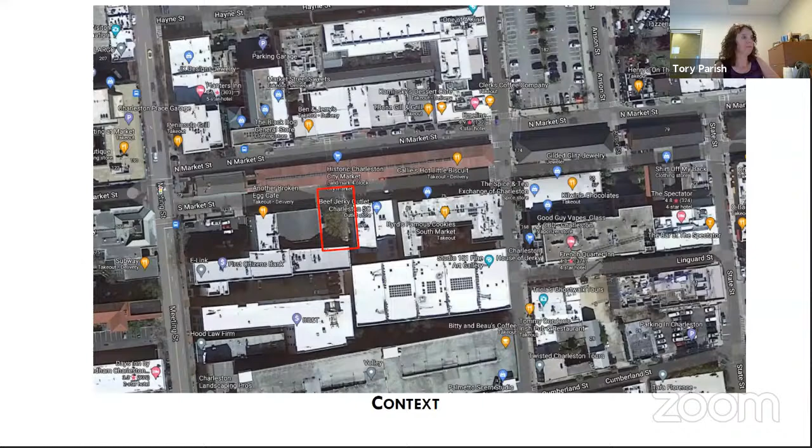And we have some existing site photos prior to the demolition. This one's looking east on Market. And we'll have the applicant present now.

Very good. Who do we have here for the applicant this evening? I'm John Crouch, the architect. Yes, sir, Mr. Crouch, you have the floor. Do you need my address or anything? You can just put it in there for the record, but we know who you are. I'm at 666 Harbor Creek Place in Charleston, 29412. Thank you, sir.

So as I said 2 weeks ago, I bring you the real thing this week. Honestly, it's a pretty simple request. You all saw the state of the Bubba Gump thing, and it was even worse than the photos depicted. Our aim here is to create a unified courtyard using modern materials to create a sort of almost like a European square where you can sit outside and have a little food and a drink with canopies over the entrance.

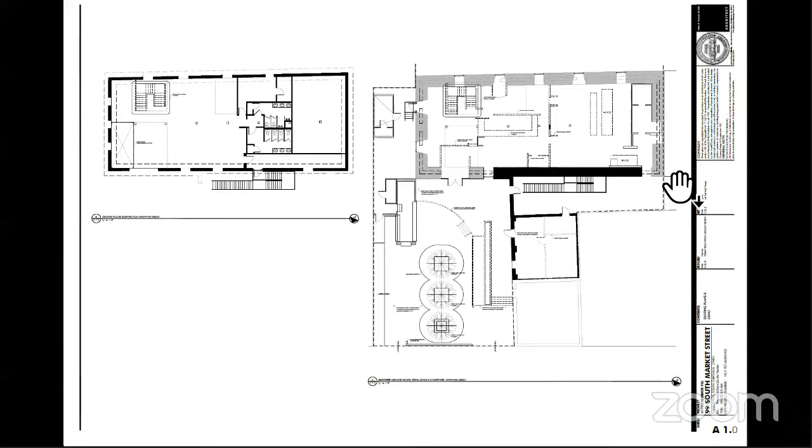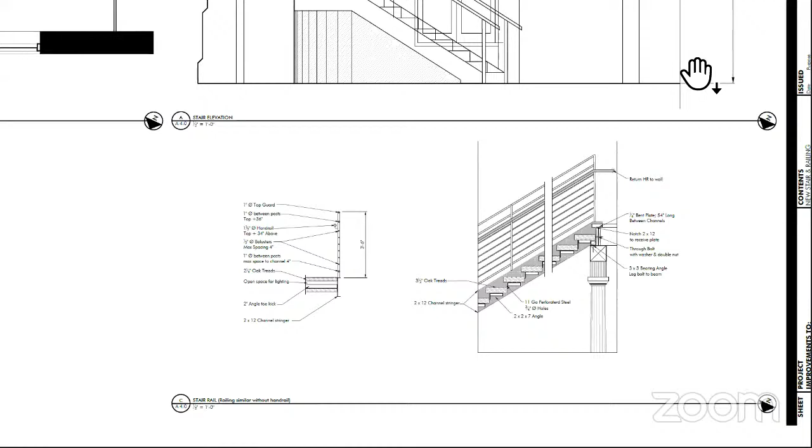You'll see that the canopy slopes back towards the building, and then there's the channel gutter that picks it up on that upper right detail. That detail also indicates the railing, which is simple round pipe to be painted that dark blue color.

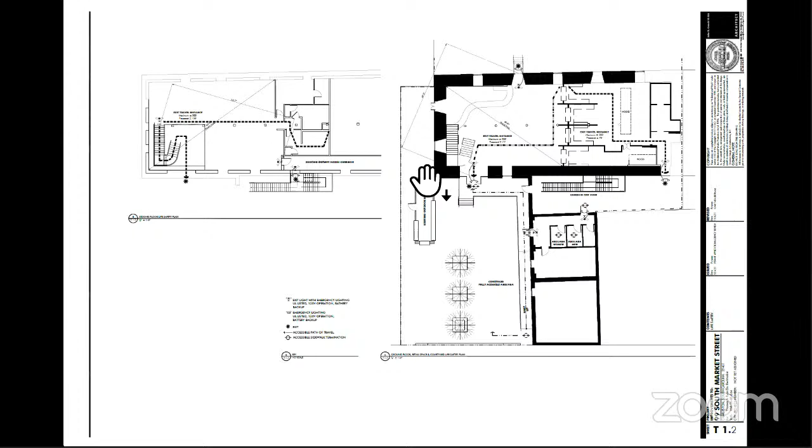On the lower right is the Moscow Midnight color that we propose to paint the base of the building and the base of the little outdoor building. The body of the building is this rhinestone color—it comes across rather gray in this depiction, but it's actually a very crisp white with a little bit of gray, a nice color.

One thing about that: the landlord has agreed to paint not only our lease area building but also the Market Street face of the brick gable building that the Five and Dime occupies, so this assembly of buildings will be unified and the Five and Dime facade cleaned up. That will be in the rhinestone color, a light whitish gray. It's not shown on the drawings, but I'd like you to know that and hopefully approve it.

Let's see, plants, lights—oh, lighting in the courtyard. We have some bollard lamps scattered around. And if you look at...

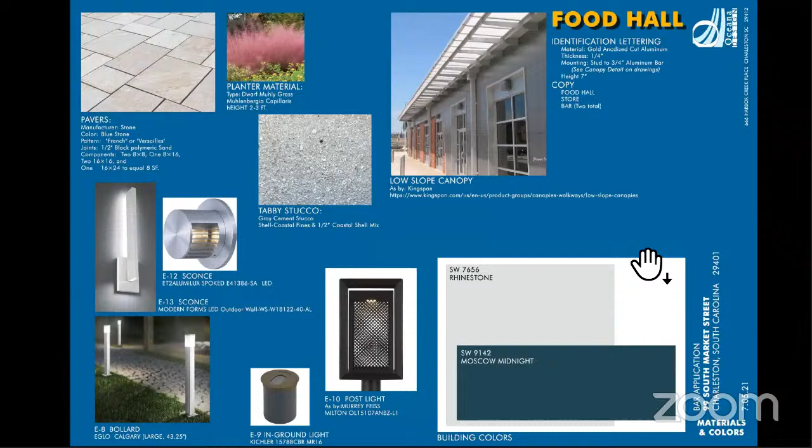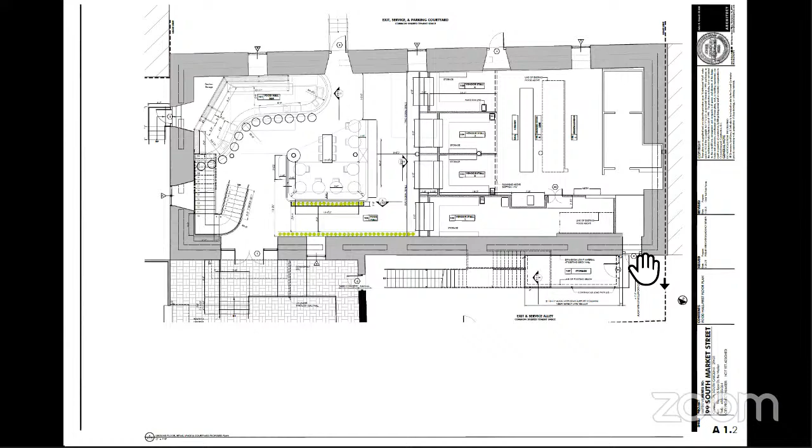I know I'm getting close on my time, so I'm hurrying through this. That's food service. Yes, if you go to A7.2 on the permit drawings, you'll see along the ramp there are six of these post lamps—that's the E10 post light shown in the middle on the supplemental information.

This is one of those times when it's tough to do it virtually, because you have to go back to the supplemental information and can't refer to two things at once. Sorry.

So they're very well screened lights. I didn't want people walking down the street to have bright lights shining in their eyes—this is a diffuse light that will light up our walkways.

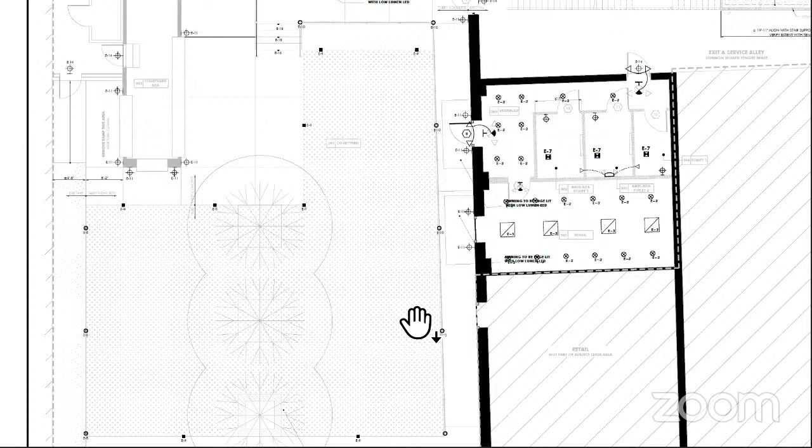The lamps in the courtyard are the small bollards, again hidden-source lights that shine down, and there are a couple of in-ground lights just to create a more uniform illumination.

There are lights on either side of the main entrances to the doors, and a couple of little sconces—round sconces that shine down. Again, all the light sources are shielded. I just don't like to have points of light shining in my eyes, and I try not to do that in my projects.

Really, that's about it. If you want to refer to the elevations, I think that would be sheet 2.0.

You can see the main elevation of the entry, with its canopy over the new doors. Those doors are the same kind that go into the retail space on the side—wood, full view glass doors. Nothing controversial there, and they unify this courtyard, getting away from the standard bronze aluminum doors that are there now.

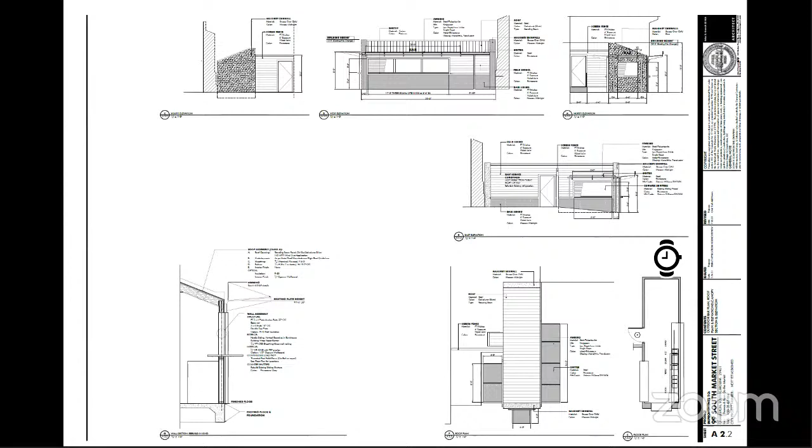So if you look at this, the base of the thing from the ground to that first hip in the brick is the dark blue color, and then the remainder is the limestone, the white. Then if you go to A 2.1, you'll see the other view of the courtyard, and that's all the limestone color. We're going to carry that around on the front of the gable building, not up to Broken Egg, but it'll stop at the Broken Egg building—or Mistral, if you remember Mistral. I love that place.

So really, if you have questions or clarifications, I'd be happy to make them, and I'm open to discussion.

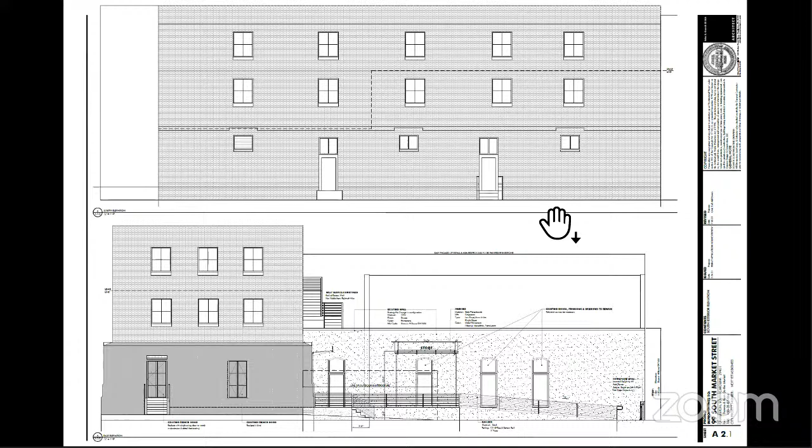Thank you, Mr. Crouch. You're welcome. Do we have any public comment on this agenda item? We do not. All right, then we'll move on to city staff comments and recommendations.

Some staff observations. Number 1, related work received after the fact approval for demolition at the June 23rd BAR meeting. Number 2, previously shown artificial turf has now been replaced with appropriate specialty pavers and other surfaces. And 3, details on the new planter atop the extended wall at the sidewalk and lighting have been provided to a cursory degree. Staff requests additional clarity on the proposed lighting.

Staff comments. Number 1, construction has already begun, although a stop work order should be in place. Applicant is advised that work is not to begin until approved by the board. Number 2, existing trees are to be protected during construction. 3, provide manufacturer's cut sheets or information on all proposed exterior lighting and include photometric data for each fixture type, as well as the whole courtyard area. And 4, provide clarity on the proposed color scheme.

The south courtyard wall is connected to or is part of 182 Meeting Street, the First Citizens Bank. The east courtyard wall is part of the building that fronts South Market Street—that's the 5 and Dime General Store on Google Earth—and looks to be painted like the proposed body color. Confirm the extent of the proposed painting. Staff recommendation: final approval of courtyard renovations with board and staff comments, with final review by staff of exterior lighting and paint.

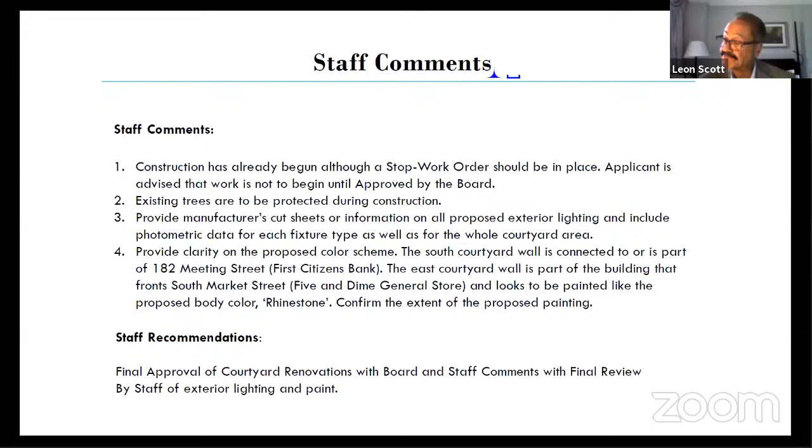I would be happy if that stays on staff level. Okay. Thank you, Ms. Wheeler. Further board comment on this agenda item?

I'll just add that Ms. Parrish has given enough indication that she would like to see mock-up panels sampling the color because of the prominence of this facade and where it's located in the city. While she would defer to staff and appreciates our trust in that, she thinks it may come into the board's need to review just because of where it's located. I'll just give that as food for thought.

Any further board comments? And if not, I'll be glad to entertain a motion.

This is Kara Wheeler. I'll make a motion for final approval of courtyard renovations with board and staff comments, with final review by staff of exterior lighting, paint, and paint mock-up on site. Ms. Wheeler, your motion, as I understand it, is for final approval of courtyard renovations with board and staff comments, with final review by staff of exterior lighting and paint and a paint mock-up. Is that correct? A paint sample? Correct. Okay, you have heard the motion, and Ms. Wheeler has confirmed that I've restated it correctly.

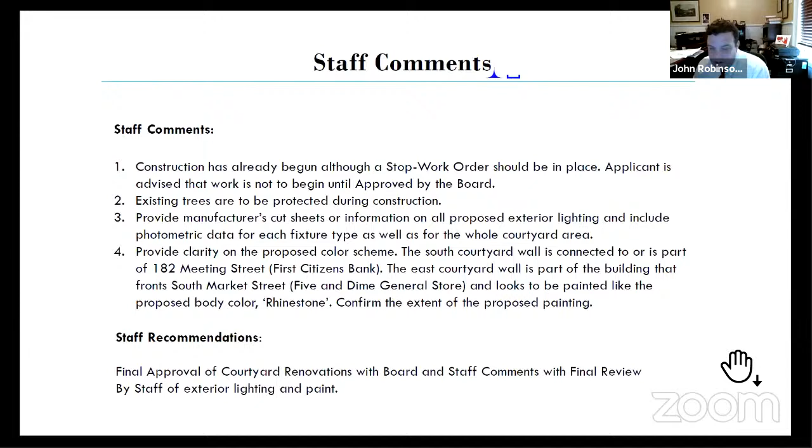Thank you very much, thank you to Mr. Crouch, we will work with you on the paint. I'll be happy to. And the lighting. Thank you very much. Okay, Mrs. Parrish, when you're ready, agenda item number 2. All righty, we need to get Mr. White back in the meeting. And thank you, Ms. Wheeler.

There we go. All right, agenda item number 2 is 284 Meeting Street. The request is final approval for new construction of a commercial and residential building. The project is in the Ansonborough neighborhood in the Old and Historic District.

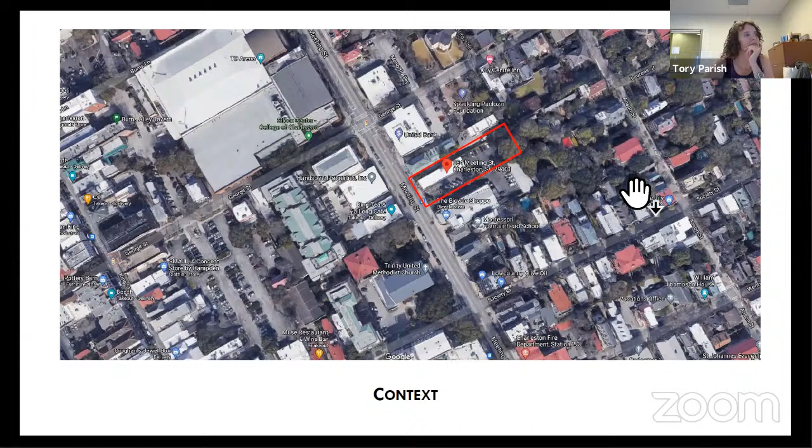The aerial context shows George Street running southwest to northeast in this photograph, with the project site outlined in red. Then we've got existing site photos looking directly at the project, from the north side, from the south side, looking south on Meeting Street, and looking north on Meeting Street. And then another aerial giving more of a pictometry look.

I'm going to run through the previous staff comments from the June 26, 2019 meeting, since we will be referencing these. Number one, drawing sheets should be numbered and a drawing list provided on all submittals. Also, notes of materials and other information should be called out on the proposed elevations. Number two, a masonry wall on the south property line is now proposed versus the previous proposal for a wood fence. The storefront design and materials have improved.

Sapele versus aluminum, but GFRC is not preferred at the lower levels. Number three, the retail entry has been recessed and specialty paving provided from the entry to the property line. Number four, the mass in the north-south direction has been reduced 3 to 4 feet.

The board had requested a much greater reduction in the mass of the rear to align with the front building. Staff feels that the addition is acceptable as now proposed. It is far enough back, 140 feet, and now includes windows on the south elevation by being set off of the property line. The normal pattern of rear additions being held back to align with the front building is more applicable to additions on existing historic structures.

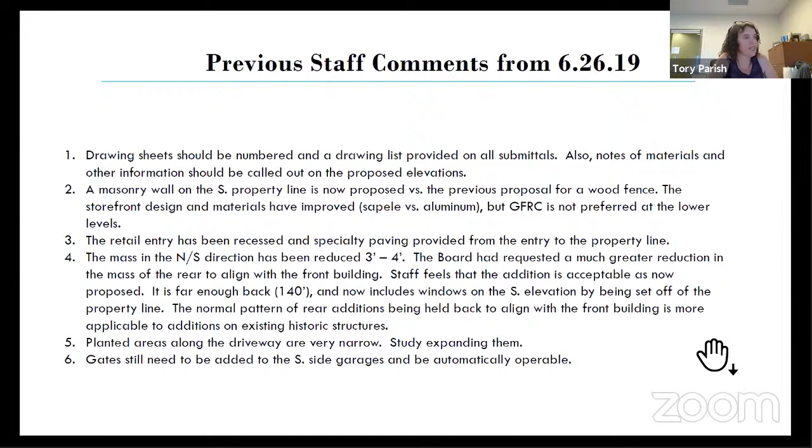Number five, planted areas along the driveway are very narrow. Study expanding them. Number six, gates still need to be added to the south side garages and be automatically operable.

Seven, provide a fence and gate at the north between the buildings. The gate bottoms should be lower to the ground typically. Eight, spandrel glass shown on the rear of units 1, 3, and 4 would not normally be permitted, but it is on the rear and minimally visible.

Nine, driveway gates should be wrought iron and mounted to the masonry piers rather than to metal posts. Ten, there's a conflict on the call out for garage doors indicating wood in some cases and metal in others. They should be wood. Number 11, metals for railings and fencing are alternately called out as iron or painted metal. All should be wrought iron.

Twelve, at some units, opaque glass is used at kitchens. The color and opacity of these needs to be studied carefully to minimize visual impact. Thirteen, scuppers and downspouts may be best as painted metal to match other metal elements on the building. And fourteen, what is noted as limestone looks more like cast stone on the sample board. Confirm that it is in fact limestone.

The board motion only included staff comments. And we will have the applicant present.

Very good. I believe Mr. Schmidt is here to present to us this evening. With us, Mr. Schmidt? I am. You have the floor, sir. Thank you very much. I'm Joe Schmidt, Evans and Schmidt Architects.

We are bringing this back after what looks like a considerable long time. This is sort of a byproduct of COVID, where design-wise things got set aside as well as construction-wise. So there was no interest for the developer to be building this project, and it has sort of fallen silent. And we're recognizing that it's time to bring it back. We apologize for short memories for a long span of time since whoever heard this application before. It's almost too long ago.

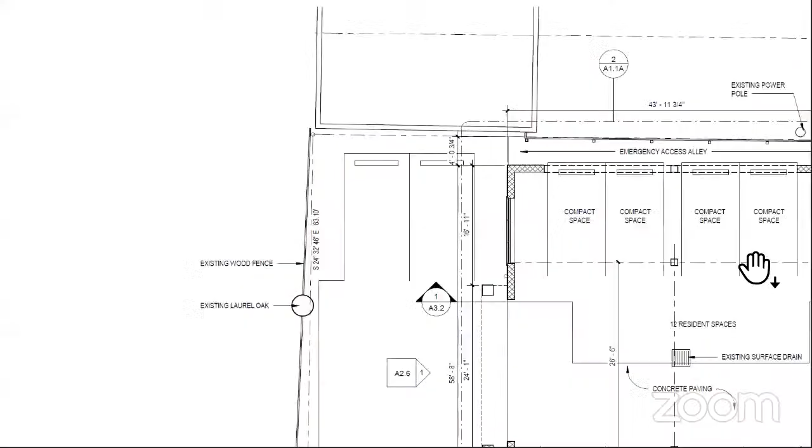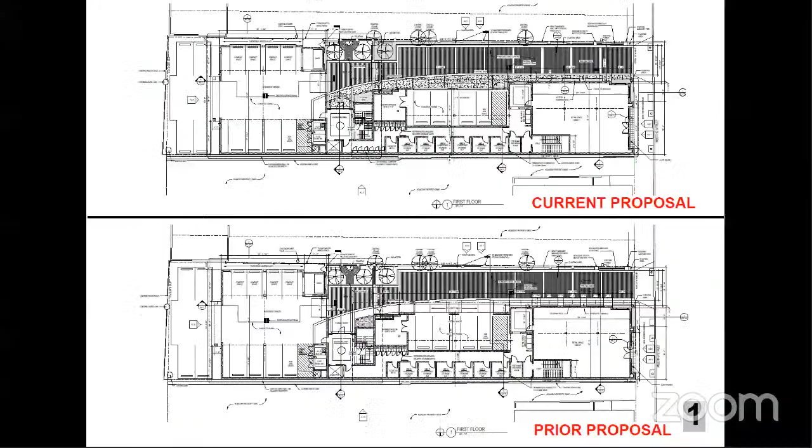We have made the corrections to the drawings that have been discussed. The first being, you might go to slide number 46. I apologize, I just let you plug the numbers in, but I guess not. That's okay.

This location, Tori, I'm a little thrown off because what I got back from staff didn't have a 13 and a 14 in it, so I don't know what to say to the limestone. I don't even know what we presented it for. But this was GFRC before, and we went to cast stone here. So limestone would be a bit much on that cornice work up there, but it's maybe something we have to take up separately because I'm not sure where limestone was called out. Right now, things are being shown as either stucco or cast stone. I don't recall us ever presenting limestone on the project, so a little bit confused on that 14th comment.

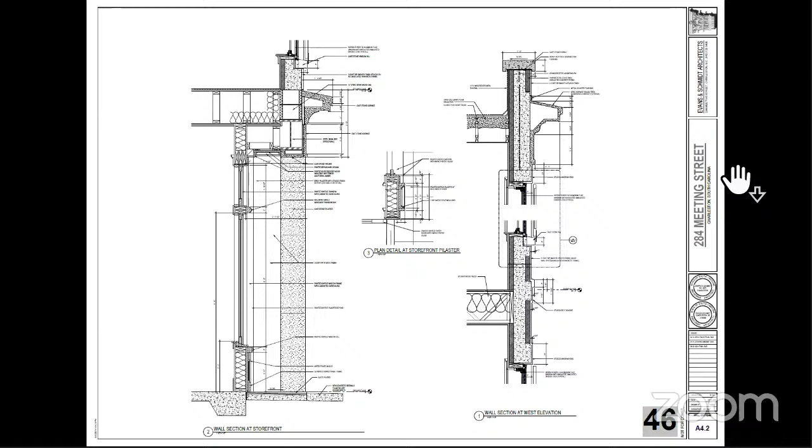While he's getting there, I can explain what it is. There was concern that the planting bed was not wide enough, and you'll have to believe me that every developer or owner would rather have more planting bed and less hardscape pavers.

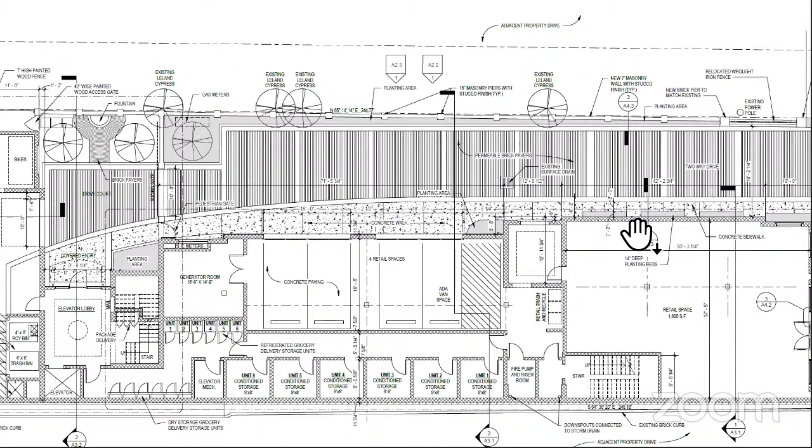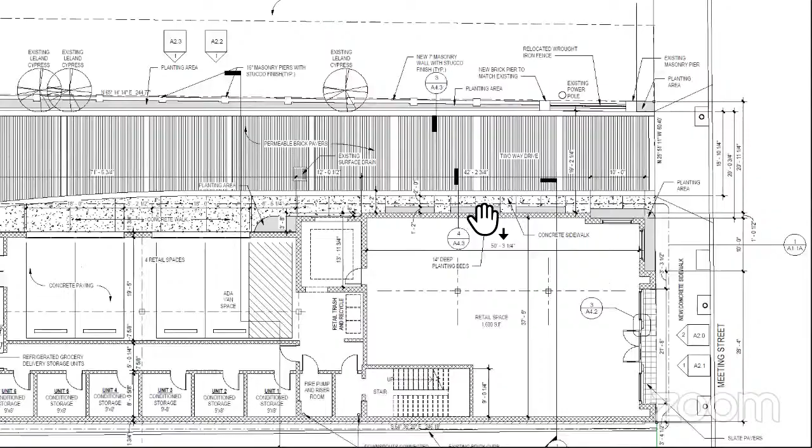The reason it is the way it is due to the fire department insisting on the width of the driveway being what we're showing. What we've been able to do is narrow the driveway down and create a sidewalk so they can drive on that too. All we were able to give is that little planting bed where the hand is right now. Used to be 6 inches, and we were able to push it up to 14.

But what's happening is if we're not careful, we're getting into a situation where we're pushing everything over lopsided. We just can't - they want the width that we're showing them, and we can't do anything less than that. So we believe 14 inches will obviously allow things to be grown in it.

The next item that came up was number 18, which we talked about a little bit. I'm sorry, not number 7, which is slide 18. Shows best what we're trying to say.

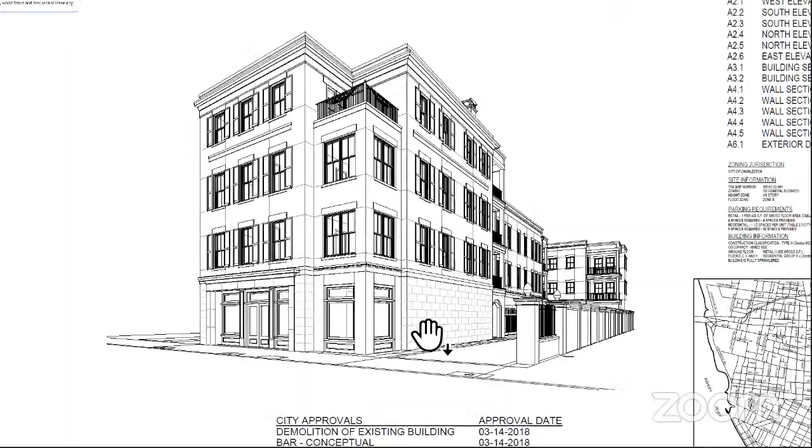So what you see on the storefront will be beveled or reglet. That's our desire, correct there. What is shown on the south side of the building - no, don't come back to the south. That's the south side. We are not proposing to reglet or bevel that, but the notation implies that that's supposed to be rusticated too.

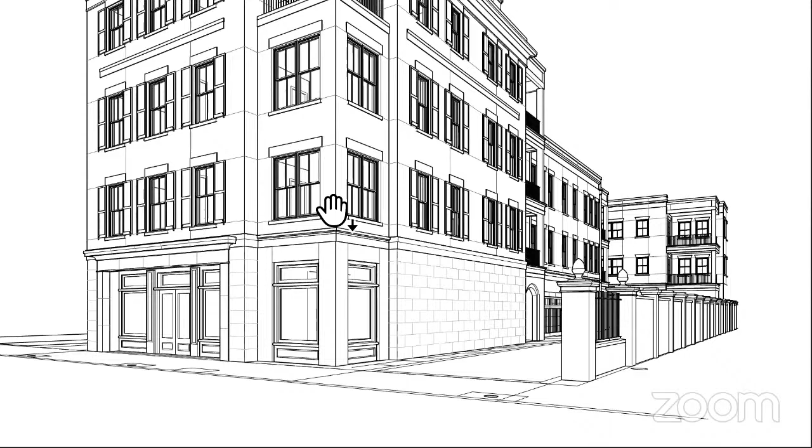The appropriate thing to do for Ansonborough, for basically all of Charleston in this kind of situation, to not have a blank stucco wall, is to pencil score - which implies pushing a pencil into wet stucco. It's a very subtle technique. The goal is that that pattern will match the height of the reglets on the front of the building, but it will not be the kind of rusticated stone the city was describing. So just wanted to clarify, we have not exactly given them what they asked for in that case.

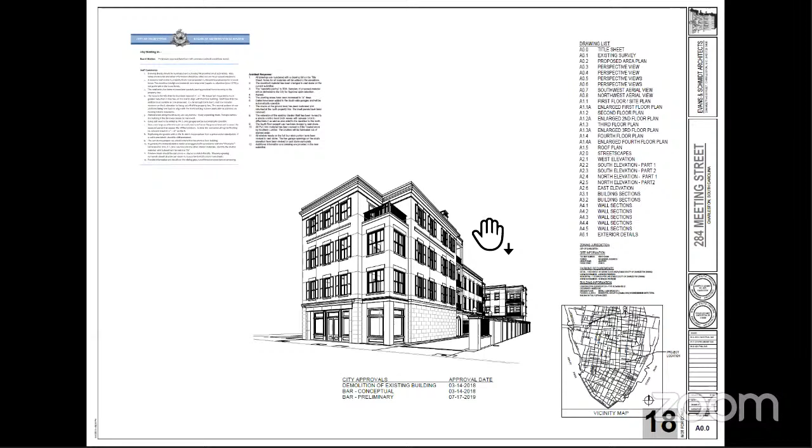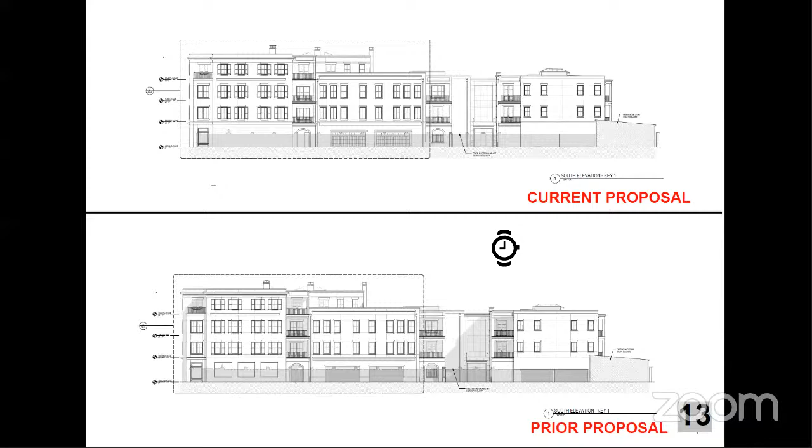Item number 8 is about replicating the garden wall on the north side being inappropriate. If you go to slide 13, it would show it best. What you see in the prior proposal is what we proposed before, and what we have put into the current proposal but don't agree with is on slide 13.

The current proposal up top, where it is, when he gets there, is just a solid brick veneer applied to our building to give some relief to all that stucco along there.

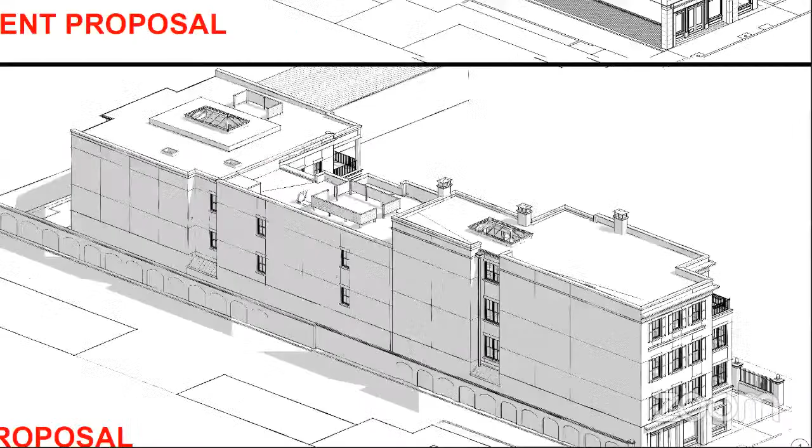What I'd like to do is bring it up for discussion. We could not submit a changed drawing, but once this got advertised, the neighbors next door directly to the north, where the hand is right now - which is 286, there are 9 condos on that project at 286 - have come to me and asked if there's any way to go back to the prior proposal or some facsimile. And I do not disagree with them, for 2 reasons.

What needs to be remembered is that what you're looking at in the back half, 124 feet back from the street, you see a small jog in that garden wall. Go mid-screen, come back right there. That is the beginning of what's left of the original 1801 wall going backwards.

It's all old Charleston brick. It's stucco in the arches. It's been that way since it was built. And then it stops right there - it stopped because they tore down the front portion when the current building was put there.

I understand that, they obviously agreed to it. What we are proposing is just to put 4 inches of brick on the face of our wall from that point forward - not old brick, but new brick. So it won't match in color, texture, or size, but it's brick because it's a better relief for them, which they've asked for, and it's something we worked out with them in the previous application, which went by the wayside based on staff's comments and our corrections in the current proposal.

If we did that, we'd be applying 4 inches of brick to our wall, and where we're not applying the brick, you'd get the stucco arch look, because it's a stucco faced building. I know everybody in Charleston is much smarter than our tourists, but I can't imagine anybody being confused that we are historically representing this as an 1801 arched wall when it's what we end up with.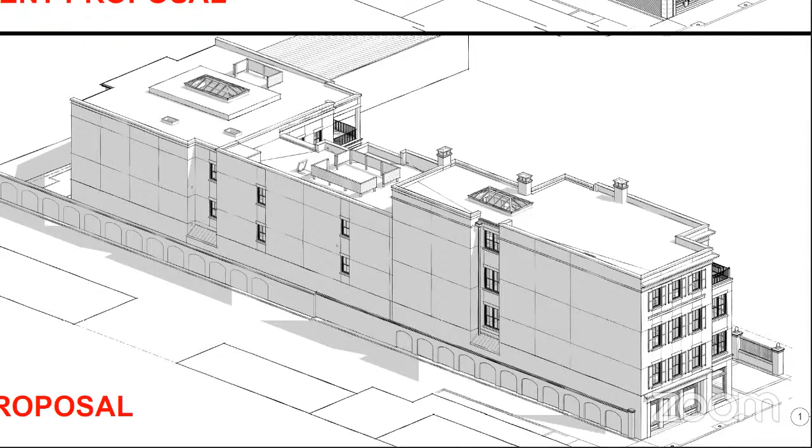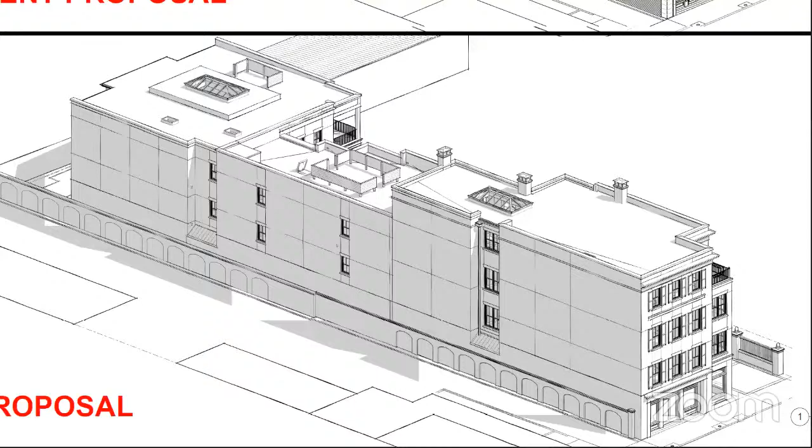It could be painted in that pattern, but I think their real point is they were looking for the calmness and texture of brick rather than more stucco, because they're being confronted with a north wall that's very typical, but not something they're used to. So I'll let that go to later discussion with the board. I hope it'll come up.

I think we've followed everything else that's been asked of us. We did do cast window heads to match the sills on the front of the building. This would be on elevation slides 37 and 38. We do not, and still do not, agree with taking it any further back into the site. There's always a hierarchy of buildings, and we are maybe a new building, but we're in Ansonborough, and we'd like to follow as much of that hierarchy as we can. So you'll see on 38 we have cast stone heads on that front portion, but not in the back. We have shutters on that front portion, but not in the back. We believe this is the better way to express this building.

We are not trying to copy, but we are trying to complement, as we've said all along, 286 Meeting, which is a very fine, properly proportioned Adams-esque building from 1801. I think it's best, since I'm hoping there is discussion on that one item about the north wall, that I will close and open it up to see where we can go with it. Thank you. Thank you, Mr. Schmidt, I know there's a lot of ground to cover, and you did.

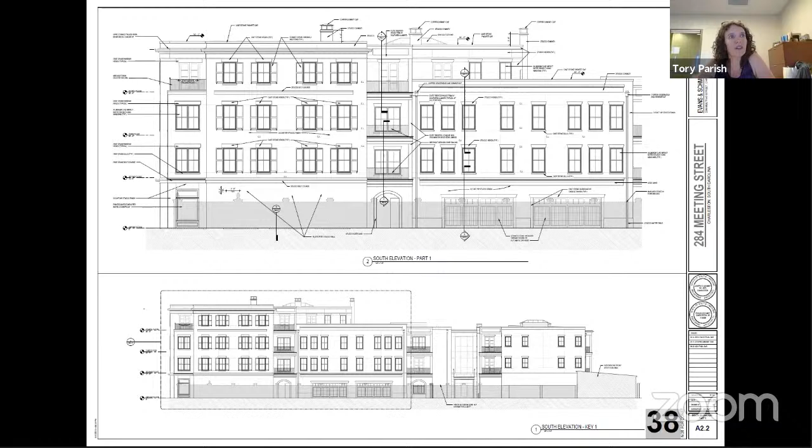Yes, I'm here, I appreciate the time to have a quick comment. I'm the HOA president of 286 Meeting. We appreciate Joe bringing back the comments on the arches. We think, we're going to go from having light and a nice historic area to having a 4-story building next to us. So the least we'd like is to have something attractive to look at as we go down the driveway.

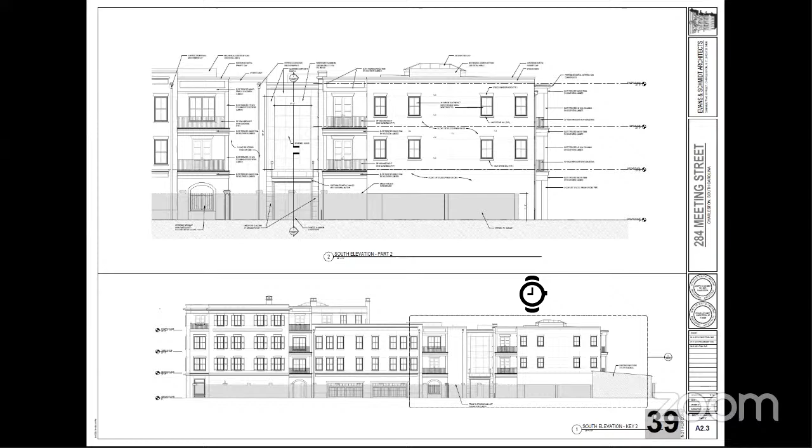If you look at the other side on the first floor, it already has that same arch, so it can match between our side and across on the other side where the wall is going to be. So our request is to have the initial proposal of the arches and brick columns as explained in the initial design, as well as the 4-inch overhang if possible on the 284 side and not the 286 side, so it doesn't affect our shrubbery or trees. And the final request is, we have the brick wall in the very back of our building that's from 1801, and when they go through the process of building this new building, if there's any damage or anything affected by this wall, just make sure it's fixed and corrected.

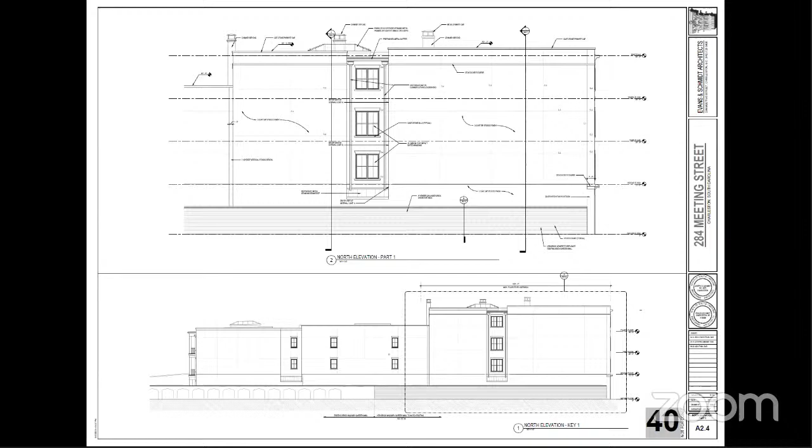Okay, thank you very much. Does that conclude your remarks, Mr. Kessler? It does. Thank you very much for your time. Yes, sir. Thank you for choosing to appear.

We will now move to city staff comments and recommendations. Ms. Parish. Staff observation: this project was well received by the board and staff at preliminary review and has changed little since then.

Staff comments. Number 1, applicant has apparently not addressed preliminary review staff comment number 5 regarding the widening of planting beds along the driveway; this was written before tonight. Number 2, the rustication of the base of the front portion as noted in preliminary review staff comment number 7 should include recessed bands between what reads as blocks of approximately 1.5 inches in height and a half inch deep. Staff will work with applicant to achieve an appropriate spacing and pattern in the stucco.

Number 3, the cap at the wood fence should be sloped to drain, and the fence composition should be similar to our typical double-sided 6-foot urban privacy fence.

Number 4, staff has no problem with the Southern Lumber Elite pressure treated wood being used at the rear painted portions of the project. Additionally, staff has no issues with this product being used at a painted storefront due to the difficulty of tracking sustainability certifications through the harvesting, production, delivery, and replanting chains. A sustainable tropical hardwood is acceptable if its sourcing and delivery chain can be verified and documented.

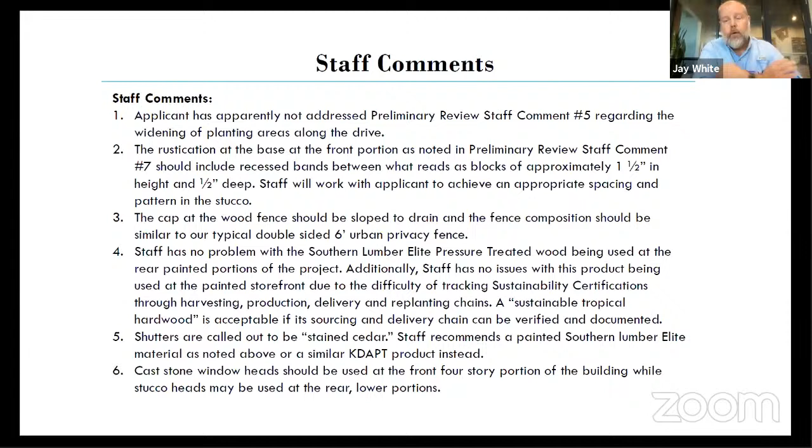I've always been a little bit nervous about elite treated, and we've actually pushed other applicants to not use it on prominent projects. My only other comment is I agree with staff comments and recommendation otherwise. And I'm perfectly fine going back to the previous iteration of the site wall, especially if it's at direct request of the most affected parties. Then I'm perfectly fine letting them go back to that. But that's all I have.

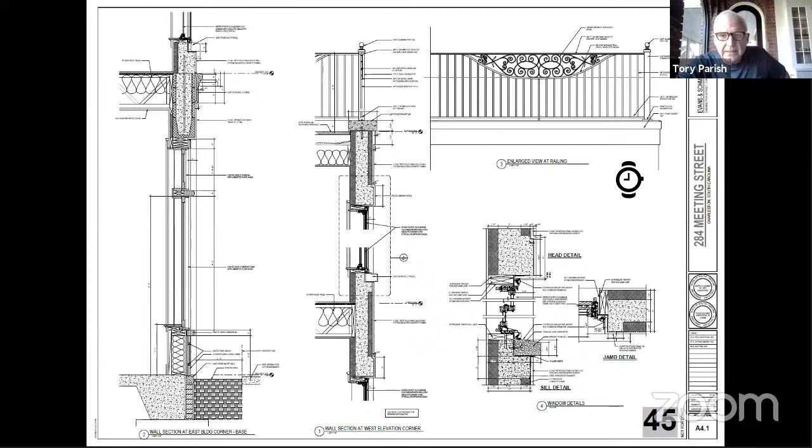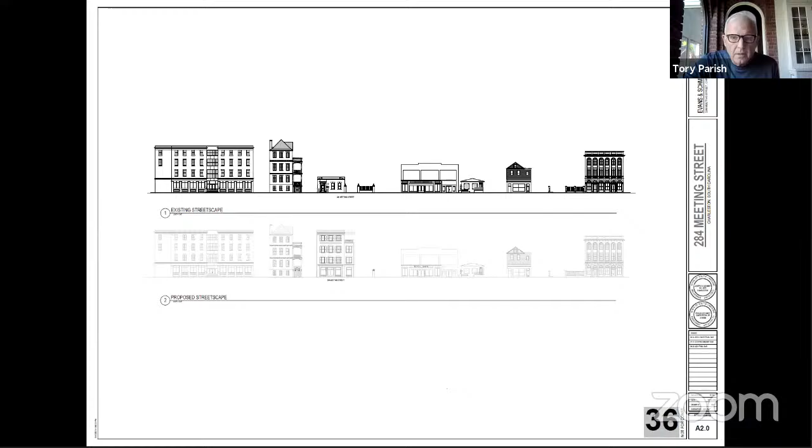Mr. Chairman, yes, James. Could Lawrence go back to the current versus previous, showing the west elevation. I guess there was one when I was reviewing it earlier called the north and west elevation.

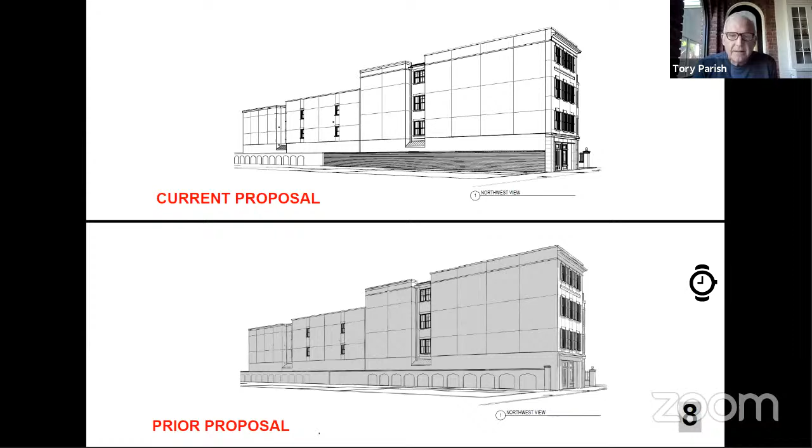Is there another version of that, Lawrence? Or maybe I was just looking at it on the big screen of my office. Hey Joe, I got a question for you. The west. North and west. That I think is west, right? Yes, yeah. So okay.

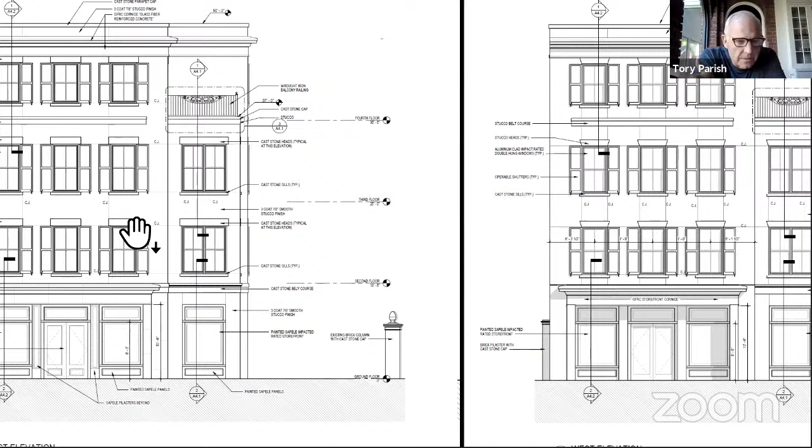The details above the windows in the prior proposal were on an angle at the headers, and it was changed to what we see in the current proposal. It's difficult to see on this drawing. There's another drawing where you can see the expansion joints—I'm going to call them expansion joints. I'm guessing that's what that is. One of the reasons you changed was so that a joint would align; here it cuts through this arch, and on the other one it kind of aligns with it. So these are expansion joints? Control joints, excuse me. We will need control joints there.

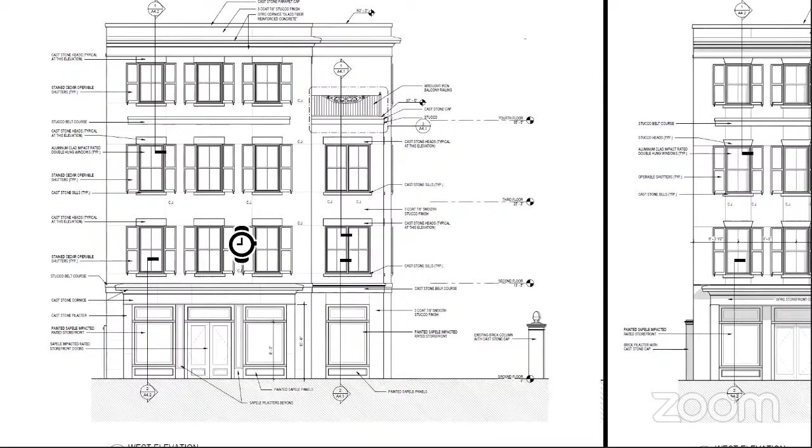What we do, and we do it very successfully on our projects, is we have them caulk. We do the metal control joint, the W-shaped form, we caulk it, and they put sand into the caulk joint. Then when it's all painted, it is about as invisible as it can get.

For your question about why we went from angled to straight: once we're going to a cast stone head versus a stucco head, the concept needs to change so that it has proper looking bearing for a stone head—it's not really a stone head—so we elected to go to the square type. We did shift the stucco line over because of that, and that also helped because it aligns the sill with the head.

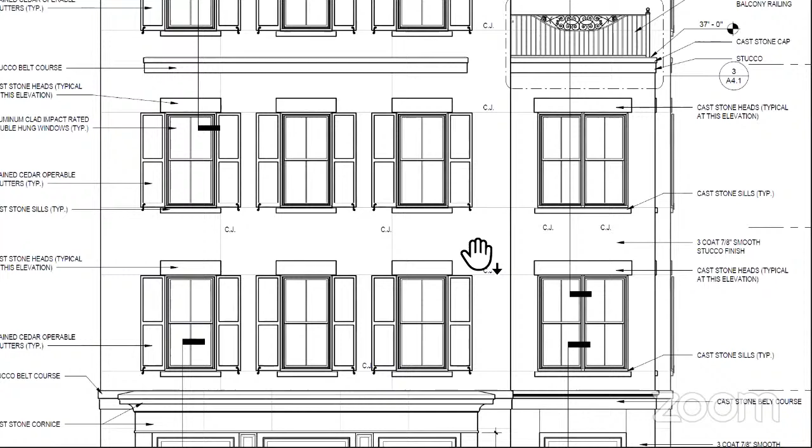So if at some point it does show up, and there's always that risk because of the stucco and the caulking you're using, if the paint blisters at all you could get a slight shine wherever the sand didn't stick, but it goes away quite well. So those were the subtle construction reasons for doing what we did.

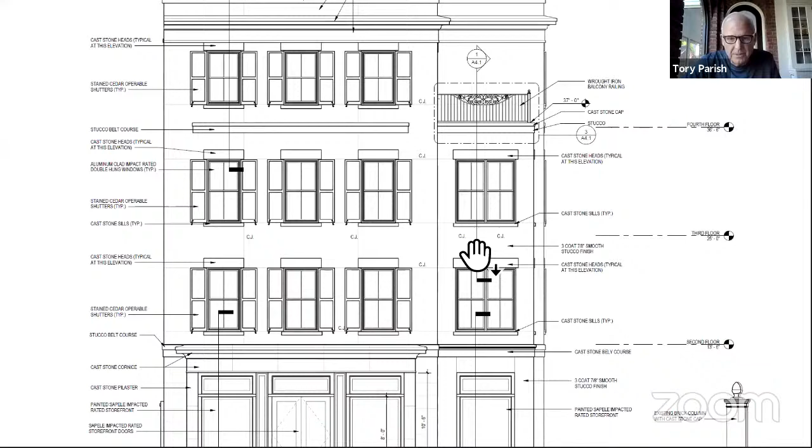There's another drawing, I don't know what it's called, Joe, that kind of shows these two elevations—actually all the elevations. Some of my comments are: you show it accurately, and I appreciate it, but the control joints begin to almost define the appearance of the building, and you won't see them as much as you're describing if that's a successful application, but you actually see them in these drawings. Maybe not on this drawing, but when you look at the back side of that building, the control joints are really defining that side. I don't know what you do about it other than the method you just described, but I wanted my fellow board members to be conscious of those things.

If I can throw something in, because we're talking about technical aspects, this is something we're always up against: control joints are required by building code on stucco every 100 or 120 square feet, I can't remember exactly. And that's a mandate, even if this may well be a CMU wall with stucco on it.

There's no reason to put it there except the building official, who I used to argue with, who's no longer there, said the code doesn't give you that exception. So people not using them on masonry buildings are actually in defiance of the International Building Code. Since we lost that battle with him, we decided to perfect the technique to make it disappear as much as possible.

You're right, it's a lot of wall, but that scoring has to do with the largest scoring you see there, exactly meeting the largest allowance for non-control joint stucco per the International Building Code.

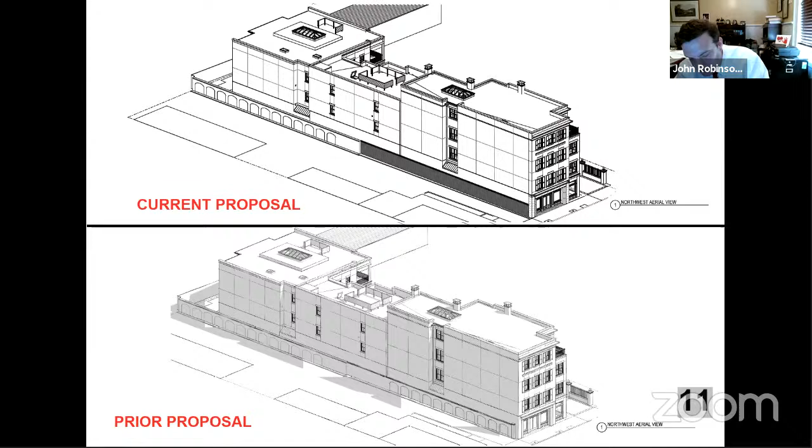And Mr. Chairman, when you're ready, I would second that, but I have a question for Jay. Let me just read it back real quickly. Mr. White, your motion, as I understand it, is for this board to vote for full approval with board and staff comments, excluding staff comment number 4, with the north wall on the prior proposal and requirement for the applicant to submit mock-up drawings for staff review. Is that correct? That's correct, yes.

And Mr. Metters, do you still second that? I do second that. I wanted to ask Jay if he would consider in his motion that I just want to ask staff to give particular attention to the shutters, and make sure that as they're looking at stained cedar or similar KDAT product listed, that great attention gets given to that for the shutters.

That's it. Rather than making that a part of the motion, I'm going to say, since we haven't voted on the motion, that it's incorporated into board comments. Okay, satisfactory for you, Mr. Metters? You bet. You bet.

Thank you. And so that having been said, I understand you still agreed to second the motion without modification, correct? Yes, sir. And so we've had a successful proposed motion and a second. I will then proceed to call the roll.

Mr. Scott, how do you vote on this motion? Yay in favor. Mr. Metters? Yay in favor. Ms. Wheeler? Yay in favor. Mr. White? Yay in favor. And myself, yay in favor. Passes unanimously. Very good.

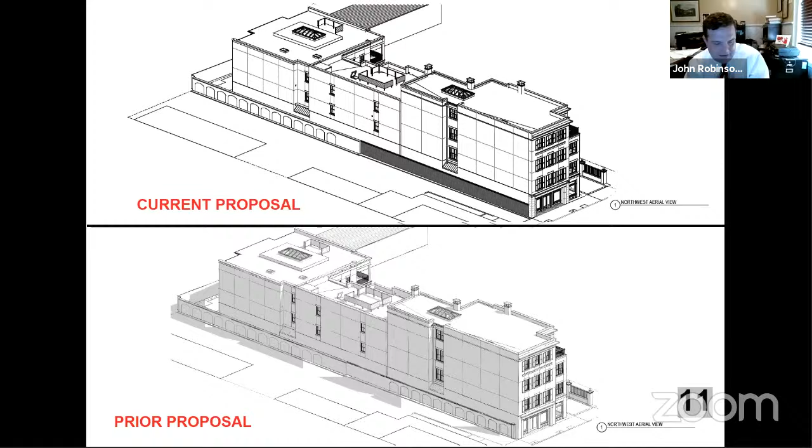I want to thank the applicant for their presentation tonight and bringing us up to speed on this particular item, and the staff's attention to detail with this, as well as the board's comments.

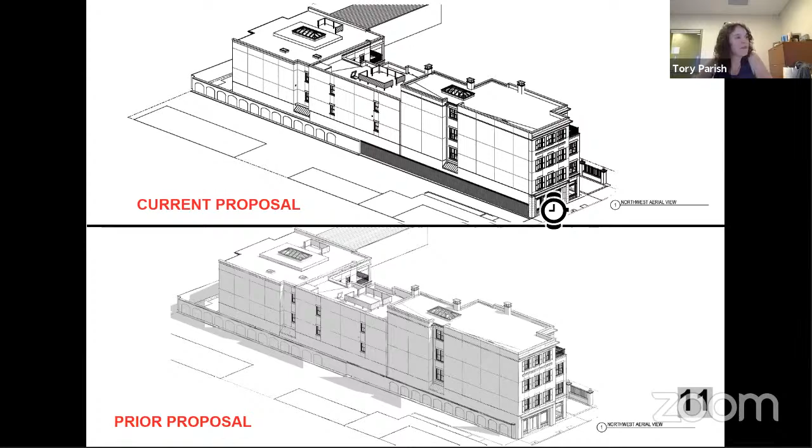Mrs. Parish, are you prepared to look at agenda item number 3? Yes, agenda item number 3 has been withdrawn by staff. And so we will move right on to agenda item number 4.

Excuse me, agenda item number 4. No, I think we have a problem. We noted that agenda item number 3 had in fact been withdrawn. Still feels good. It's like checking off something. Agenda item number 4 is 250 Spring Street.

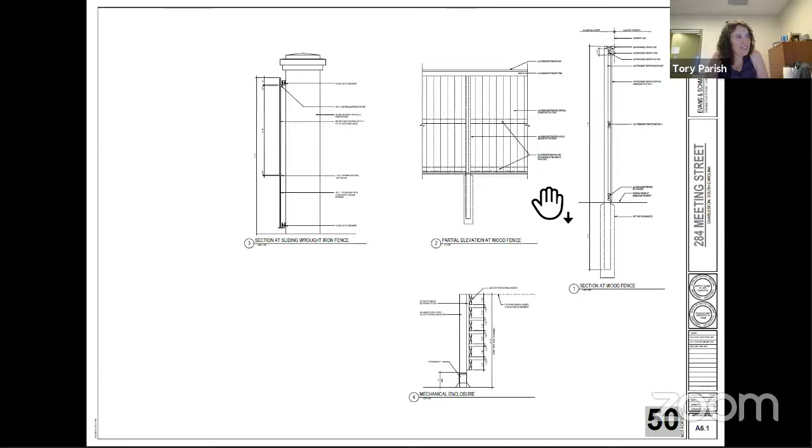That was a long drawing package, so we'll get caught up here. Okay, this is the request for conceptual approval for the demolition of an existing balcony, the balcony guardrails, addition of new windows, AC louvers, stucco, and paint.

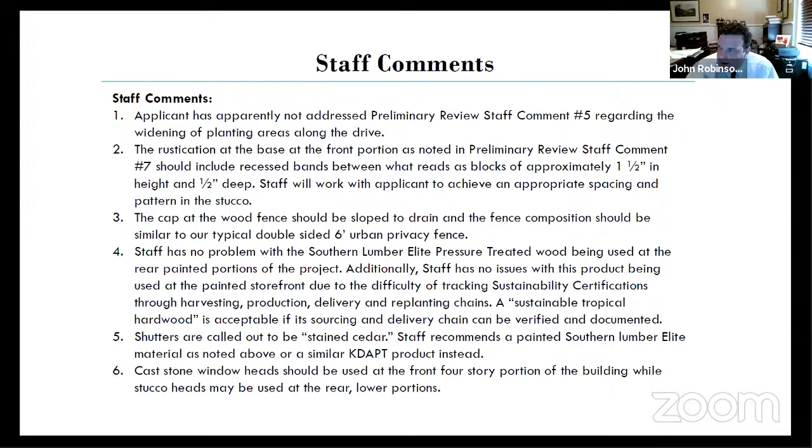Okay, hold on. There we go. No, that's not it, is it? Not quite. We'll just take a second and get rectified, caught up on the agenda item. There we go. All right.

Okay, so the building is not rated. It was constructed in 1977. It's in the West Side neighborhood, but it is also in the Old City District.

All right, the applicant, Mr. Rob Ponder, is here, and he will present the application. Very good. The applicant has the floor.

Can you hear me now? There you go, you can now. All right, thank you, and I apologize if there's a lag in the presentation, but I'm actually doing this from Paris. Well, wonderful, that may be our most remote presentation point, but enjoy the architecture there and everything else. And we can hear you just fine, Mr. Ponder, so proceed at your own pace.

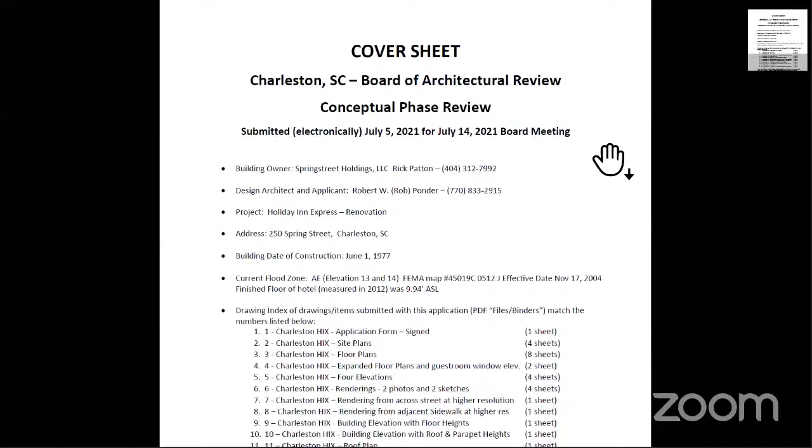All right, I am the architect that has helped the owner of this hotel on a couple of their other hotel projects. This is, for the most part, an interior renovation of the building, including carpet, paint, wall covering, tile, and new toilets and that kind of stuff. And I asked at the time they were doing this if we could go ahead and try to get rid of those 36-inch wide old air conditioners that we can't find higher than a SEER rating of 8 for. And so this kind of started with me.

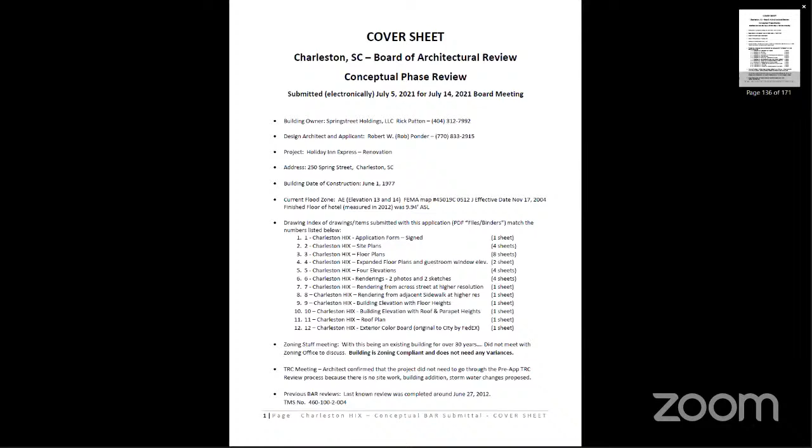And if you could go, Tory, to page 15, I think it is. No, it's going to be 18. If you could go to page 18, it's the floor plans of the balconies.

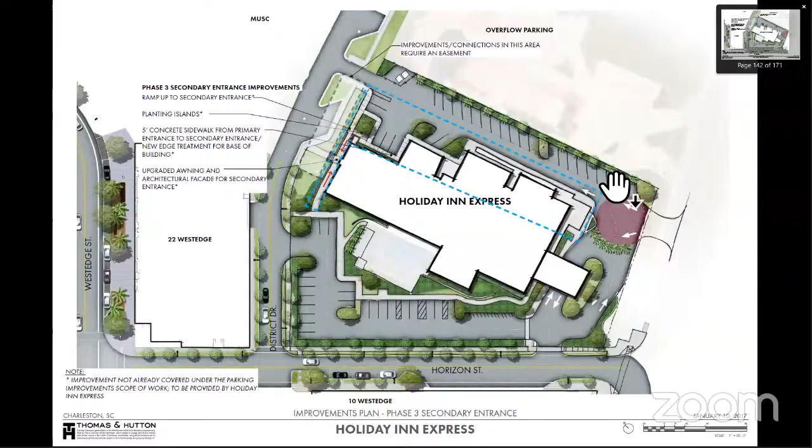So the hotel was built in 1977 and has some of the original through-wall air conditioners. And I want to go to a much higher SEER rating, newer air conditioner. But the length of the rooms, as she passes by there, you can see on the north side of that drawing, are very short. They don't have a long bed wall or TV wall. And if you'll go one more to the next sheet, if you could please. I don't know if we can zoom in on that a little bit.

So the building was built with balconies. They're only 2 foot deep, Juliet balconies, no furniture fits on them. And the current sliding glass doors, which are original also, are back in the same plane with the CMU walls that contained the existing air conditioners. She was starting to move that along that same line. That was the existing face of the building. So the building has a very flat facade. It just has these little fin walls that stick out on the sides of the balcony and the handrails for the balcony.

To go to a better air conditioner that we can get a much higher SEER rating and quieter operation, we want to go to a vertical air conditioner instead of a horizontal air conditioner. It's in the closet. You can see 2 units there in opposite side rooms that are out on what was the balcony itself. We're going to fill the balcony in slightly, take off the handrails, and build those closets there.

We had to move the air conditioner to that white spot. You can see a white void in the black walls - that's where the current horizontal air conditioners are, because you can't fit the VTAC in that block wall right there. So we put the VTACs there, and that caused us to take out the sliding glass doors and the handrails.

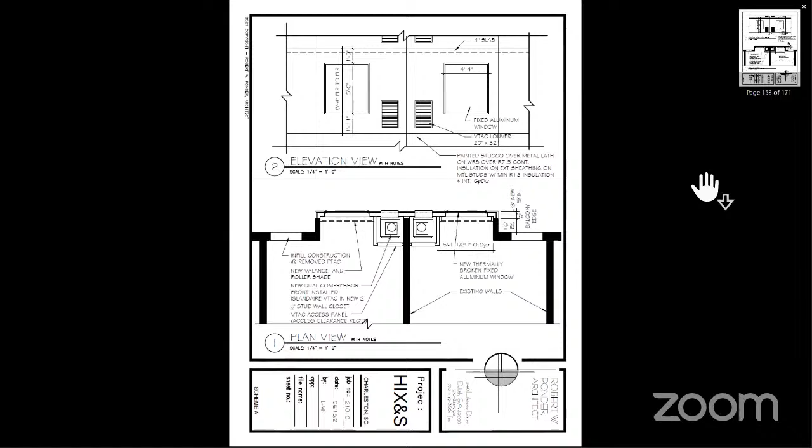So we're making a new stud wall that's out at the face of the old balcony, and we're going to go to punch windows, as you can see on the top half of that sheet. That would be a fixed aluminum window, and the VTAC louvers are now vertical instead of horizontal, but they're almost the exact same square inches of louver. They just went from horizontal to the side of the sliding glass door, to vertical next to the punch window that we have.

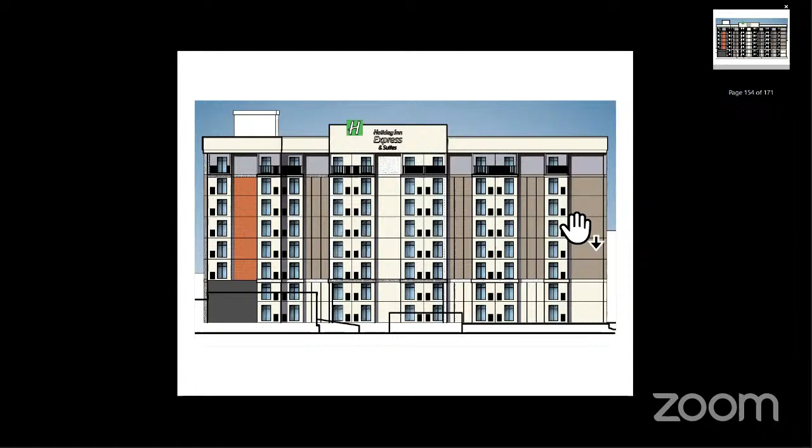If you'll go ahead to the next page after that one - now what will happen is where the punch windows are shown, they're 3 foot 8 wide, 6 foot 4 tall. Now the face of that will actually be 2 feet in front of the other stucco that's on either side of it. So we'll start getting some shadows and other things that will happen by making this air conditioning change that became a window and a stucco change out there on the face of the balcony.

We did go ahead and leave the walls on the top floor set back 6 inches from the face of the balcony and kept the balcony rails up there to create an attic story. We felt like that added a little bit better top instead of trying to make the building consistent all the way down.

The other items, like cornices, the roof, the height of the parapet, are all existing. We're not doing anything to the roof. We're not doing anything to the other parts of the first floor that project out from the tower. We're focused mainly on filling in these balconies.

The one exception to that - I know signage is only a placeholder, we'll submit separately for that - but the existing roof, when it was a Howard Johnson, that part that stuck up goes about 5 feet to the left and right of where it does now, and it doesn't line up with anything on the facade below it. It just kind of sticks up at random places. So we're clipping the corners of that off to line it up with the 2 sets of balconies that are below it.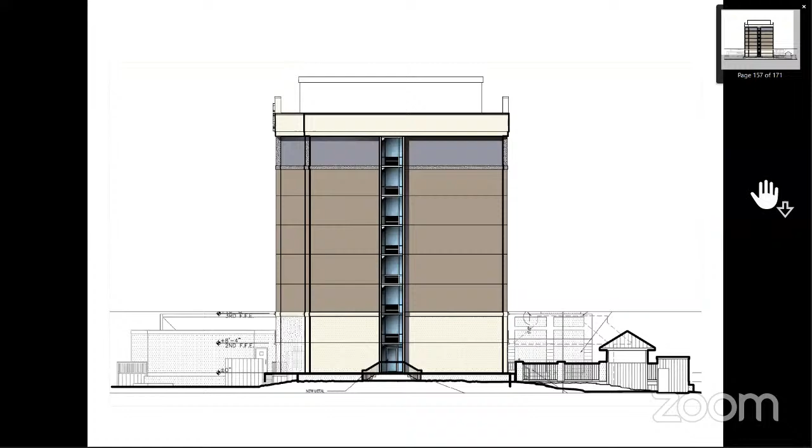And then if you can go to the last of the 4 elevations, this is the one facing away from Spring Street, and it's nothing but paint. We're not changing windows or stucco or anything on that side of the building, nothing on the roof.

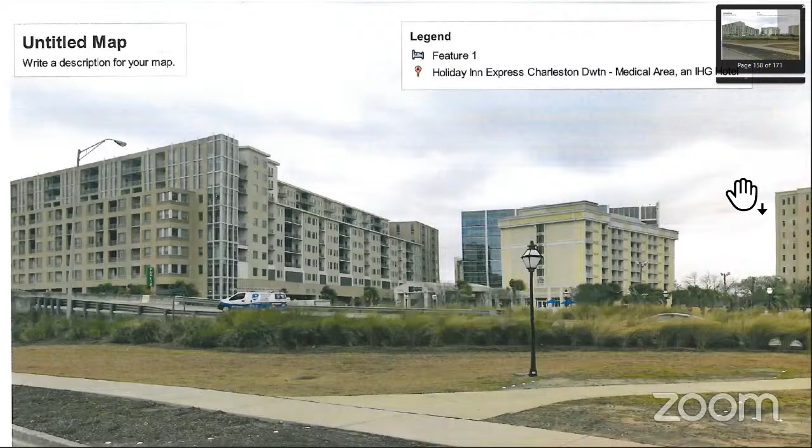The next page, and this request was for existing building photographs, and then the next page you can see the colors that we've presented on the rendering.

There it is. So we colored on top of those elevations to show that we tried, and this got washed out a little bit, but we've picked up a lot of the colors that WestEdge already has in that neighborhood. We used some color blocking, which they used a lot of across their facade.

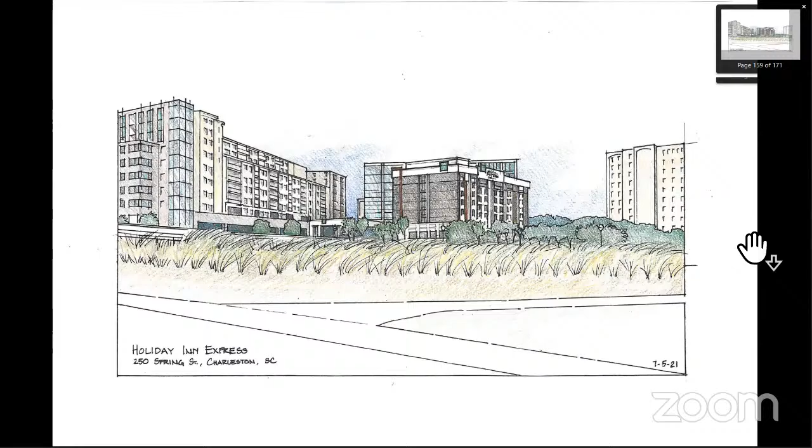So we felt that would be more acceptable within the development that's grown up around this building. Next page is the photograph from our side of the street, and then the next one is a rendering of it also. We are leaving all the trees. There's no intent to cut any down or block anything, so those will remain.

Which, from the street, conceals far more of the building than I realized until we started drawing this view. The porch and the canopy are all remaining. We will paint them the white color that's on the color board.

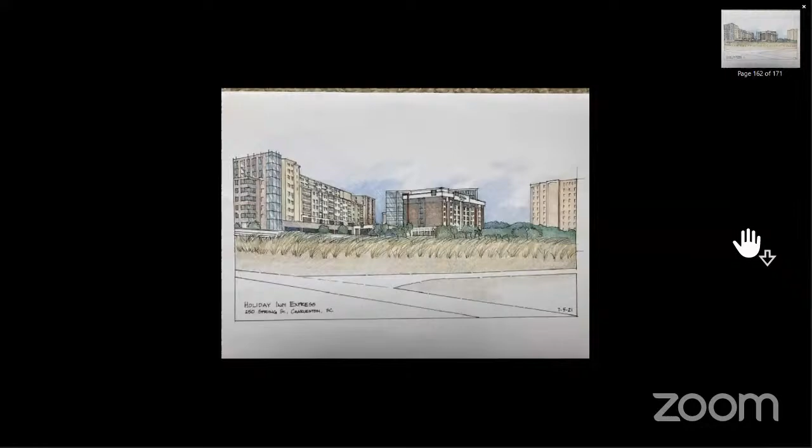You can skip 2 or 3 pages. Those are the heights of the existing parapets and roofs and stuff. If you'll go to the last page - all that's existing. We're not increasing the height or changing anything.

We've submitted originals of this, but we've given Sherwin-Williams colors for the white, trying to get a fairly bright white to match the existing storefront. The new windows will be white to match all the windows remaining on the ends of the building and the storefront remaining on the first floor. We're going with a white to try to get close to the storefront's white.

And then the 3 colors, Mysterious Mauve, Red Cent, and Mocha, in the locations we've shown there. One question we had, which I think Lawrence has been working on with some other people, is we would like to use the Sto Powerwall stucco system to help us address the energy code.

When we replace the sliding glass door with a new stud wall with stucco in that portion, we believe by the energy code we'll have to have continuous insulation on it. The Sto Powerwall stucco system addresses the continuous insulation with the lack of the wrong kinds of fasteners. I believe y'all have been looking at that for compliance with the energy code on other projects, so we'd like to use that system.

But again, all of this will be completely painted. And that's the end of my presentation.

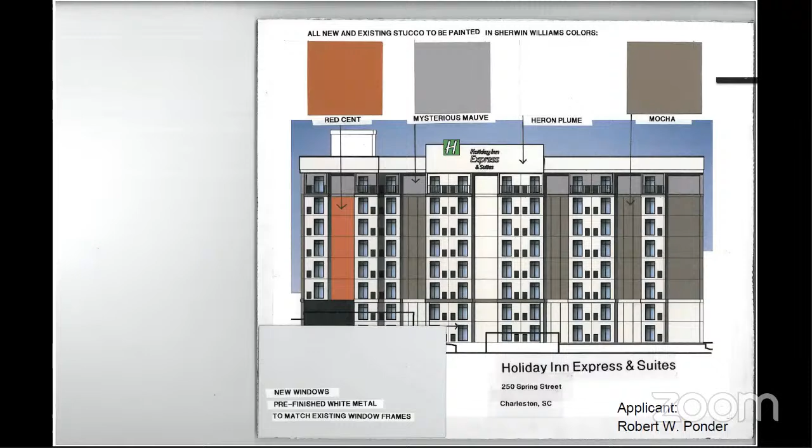Thank you very much. Any public comment on this agenda item, Ms. Parish? There is none. All right, I didn't remember there being any. Okay, city staff comments and recommendations.

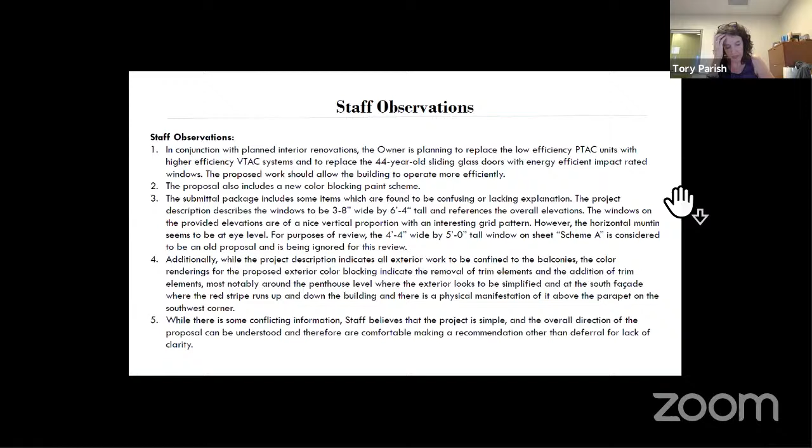All right, I have a few observations I'm going to run through. Number one, in conjunction with planned interior renovations, the owner is planning to replace the low efficiency PTAC units with higher efficiency VTAC systems and to replace the 44-year-old sliding glass doors with energy efficient impact rated windows. The proposed work should allow the building to operate more efficiently.

Number two, the proposal also includes a new color blocking paint scheme. Number three, the submittal package includes some items which are found to be confusing or lacking explanation. The project description describes the windows as 3 foot 8 inches wide by 6 foot 4 inches tall and references the overall elevations. The windows on the provided elevations have a nice vertical proportion with an interesting grid pattern, however the horizontal muntin seems to be at eye level.

For purposes of review, the 4 foot 4 inch wide by 5 foot tall window on sheet Scheme A, the detail sheet, is considered to be an old proposal and is being ignored for this review.

Number four, additionally, while the project description indicates all exterior work is confined to the balconies, the color renderings for the proposed exterior color blocking indicate the removal of trim elements and the addition of trim elements, most notably around the penthouse level where the exterior looks to be simplified, and at the south facade where the red stripe runs up and down the building, with a physical manifestation above the parapet on the southwest corner.

Number five, while there is some conflicting information, staff believes the project is simple and the overall direction of the proposal can be understood, and therefore are comfortable making a recommendation other than deferral for lack of clarity. And then staff comments.

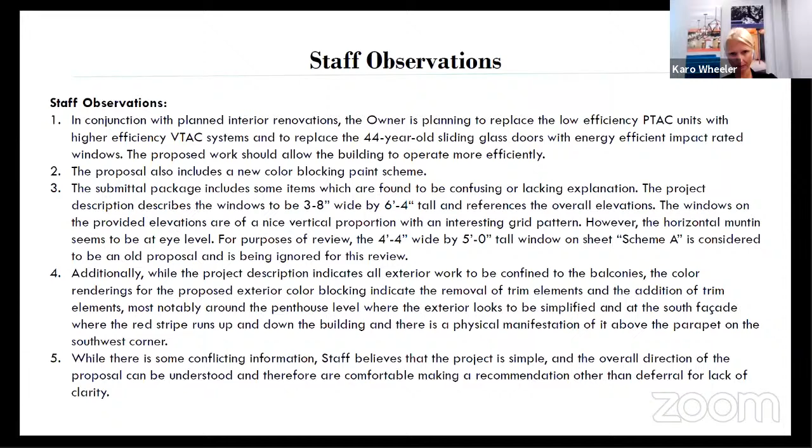Number 1, overall the height, scale, and mass are unchanged, and enclosing the balconies will create more positive variation in the building plane than currently exists.

Number 2, while the color blocking proposal for the exterior facades will freshen up the building, adjustments must occur and proposed changes must be clarified. Better articulate the exact locations for the new colors and what, if any, trim elements will be altered.

Number 3, additionally, regarding the proposed color palette, adjust the colors to be more in harmony with each other. Staff is prepared to help with selections for harmonizing the hues and shades while understanding the existing context of newer buildings. Number 4, paint the exterior vents or grills for the new VTAC units to match the adjacent exterior wall color.

Number 5, provide clarity in the follow-up submittal for all elements, including the proposed window size and placement and color blocking details. Provide color renderings that depict the proposed pre-finished white metal windows. This may need to occur within an enlarged elevation detail. And number 6, recess the windows as much as practically possible.

The staff recommendation is conceptual approval with board and staff comments.

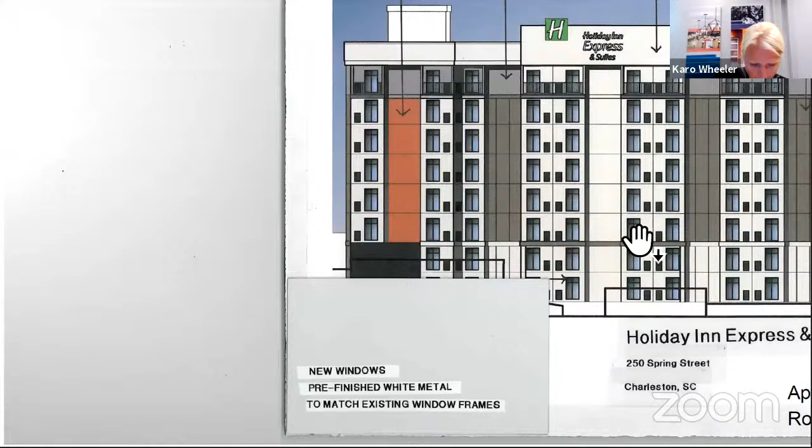Further board comments? This is Karo Wheeler. Maybe you could go back to an elevation, one of the colored elevations. I think change towards a more energy efficient system is obviously positive.

But I think there are a couple of issues with this proposal from my point of view. There's a proposal to fill in those areas between the former fins to create more articulation, but I think it actually reduces the articulation and the shadows on the building. Previously it was a very simple building with floor to ceiling glazing and balconies, although they're Juliet balconies. And now you fill in between those fins and it's just a flat facade where you add the new windows.

And the new PTAC grills are not hidden at all. Previously they were at least in the recessed portion, and now they're very prominent.

I also don't understand why the top floor is being accentuated, although it's still in the same plane. The building does have a top, so I don't think it makes sense to accentuate the top floor with a different color and leaving the railing there while eliminating the railing somewhere else.

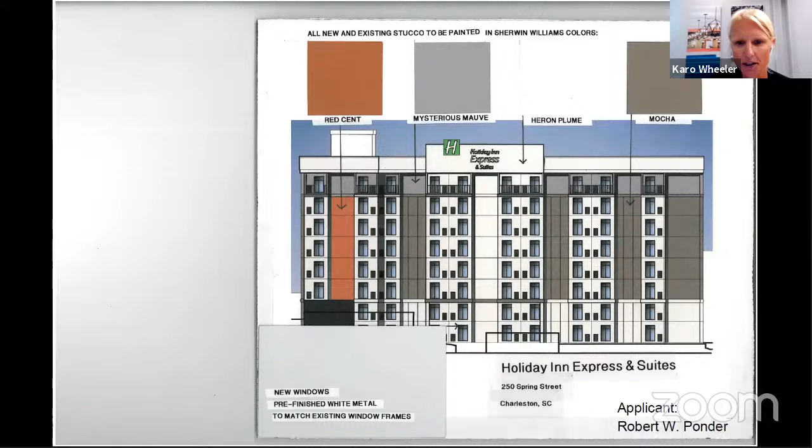So I think eliminating the balcony railings actually reduces the interest of the building, and the fact that the short elevations at the ends are not changed makes it really a very disjointed facade around the building, because they don't go together anymore, and it seems like the long elevations have one language and the short elevations have another language.

So I'm not in favor of this renovation, and I think it can be done. I think the PTAC units can be integrated and still create deep shadow lines and deep recessed windows. But what's currently proposed is really a very flat window and a PTAC grill. And I think, let's see if there's anything else.

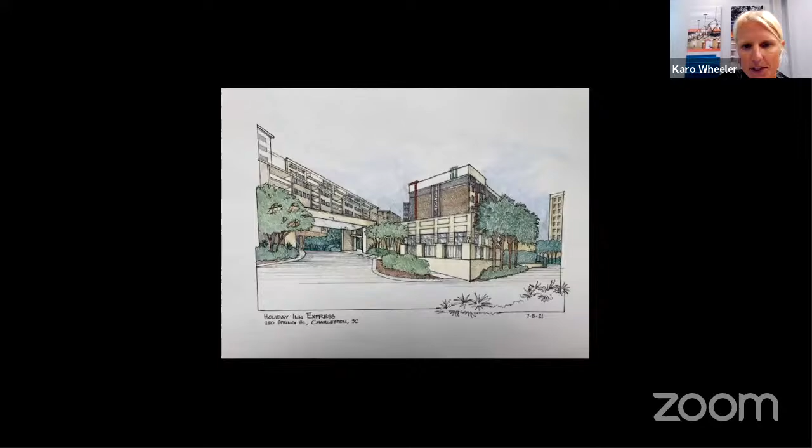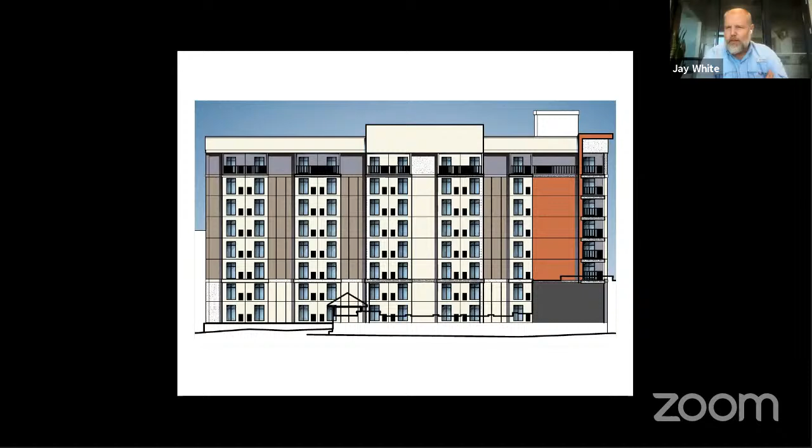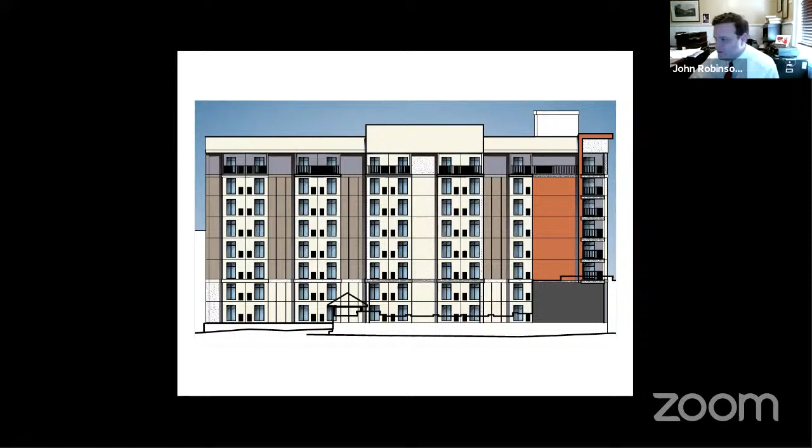Thank you all for the time and attention you give it. I'm so appreciative, I know we all are. I'm sorry, what did you say? Were you saying something, I wasn't listening. It wasn't about you. All right, y'all have a good evening. Thank you. We'll see you in two weeks. Good night, thanks everybody, see you next time. Bye, bye-bye.